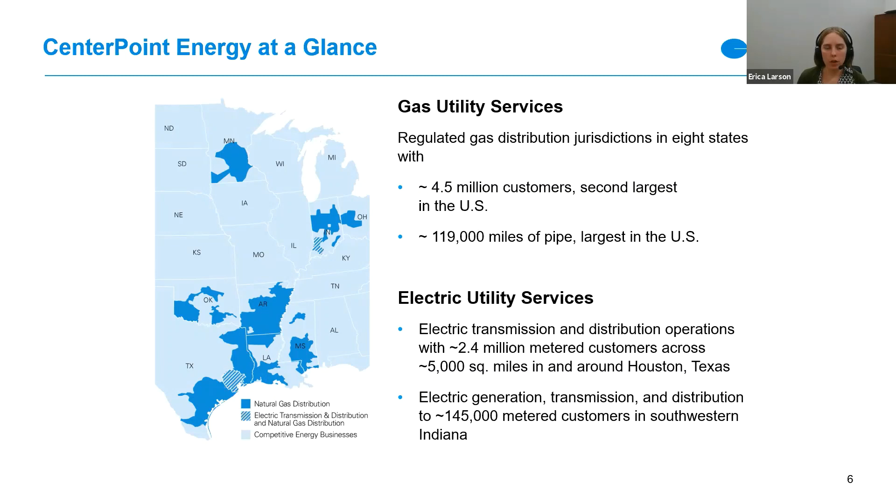Next slide. In Minnesota, we are only a gas utility. I'm primarily focused on Minnesota. We are by far the largest gas utility in the state. Our largest city is Minneapolis. Next slide.

So like many large utility companies, we have our own carbon goals. We have a net zero goal by 2035 for scope 1 and 2 emissions. This is largely focused on our electric generation that we have in Indiana, closing those coal plants, shifting to more renewable energy. It does have a gas component as well, mostly about leakage from our pipeline system, but it doesn't really incorporate much in the way of renewable natural gas, hydrogen, or some of these other technologies because it's not about the actual burning of gas in the customers' homes and businesses.

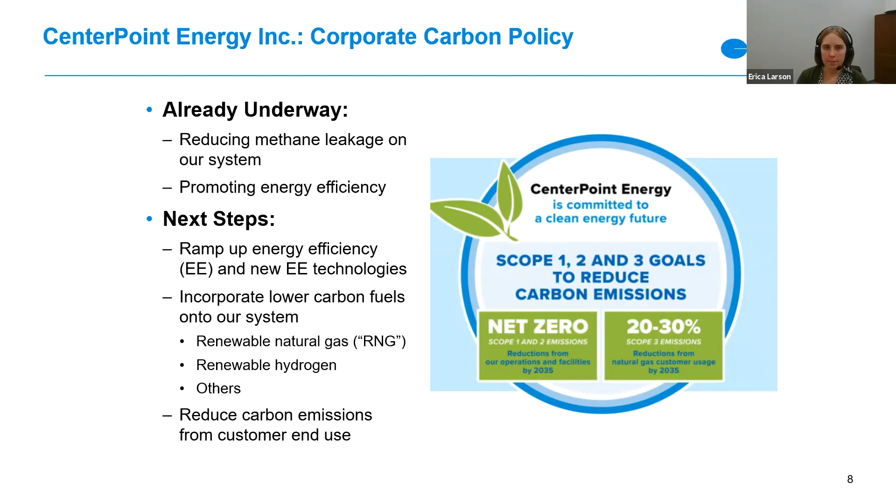So on the supply side, things that the gas utility could provide instead of fossil gas, we have renewable natural gas and biogas. Renewable natural gas is going to be primarily, we're thinking in the near term, from anaerobic digestion, although the Act also allows us to do thermal gasification or other effective conversion processes. But it does have to be from an organic source to be renewable natural gas.

Biogas is like renewable natural gas, except it's just not pipeline quality. So here we'd be talking about maybe moving gas that's produced relatively near the site of use over to specialized equipment that could burn unrefined biogas or less refined biogas than renewable natural gas.

Also in the Act are power to ammonia and power to hydrogen. Both of these are defined in the Act as being green rather than blue. So we're talking about using renewable electricity or carbon-free electricity, for example from a nuclear plant, to create either hydrogen or ammonia, and then using either of those on their own as a fuel source, or in the case of hydrogen, blending it into the pipeline system, which can be done up to a certain amount.

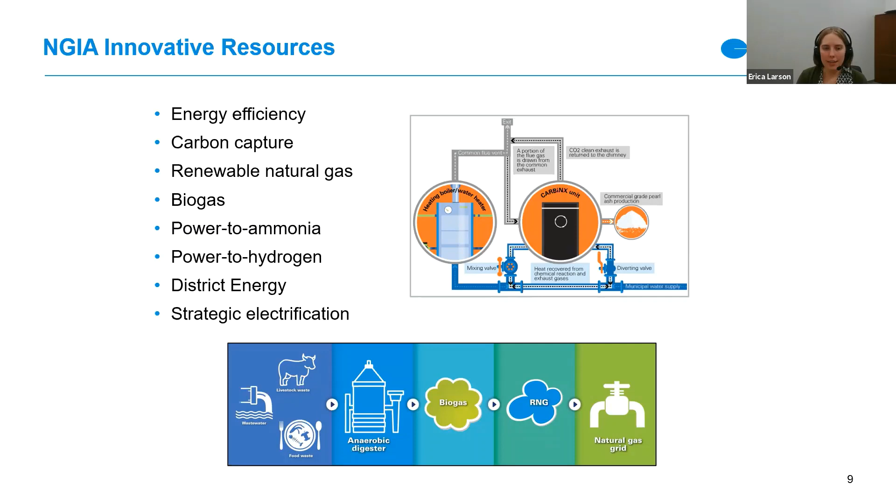Next slide. So this is my how does the Act work in a nutshell. How is it structured? A gas utility may file an innovation plan with the Public Utilities Commission proposing programs using these different innovative resources that were on the previous slide. It is optional for a gas utility to file a plan.

We didn't want anyone to get mad at us because they didn't want to do this, but CenterPoint certainly will be filing a plan in 2022. My understanding is that Xcel Energy, which is the second largest gas provider in the state, also plans to file an innovation plan in 2022.

Once a gas utility has elected to file an innovation plan, they are locked into the structure. So it is optional at the beginning, but once they file one plan, they are required to file another plan 4 years later. Each innovation plan will run for 5 years. After 4 years, the utility will file its next plan so that it will be in place before the next 5-year period.

There'll be annual status reports to the Public Utilities Commission where the PUC can order changes, can cancel programs, can add new programs. The PUC has authority to do this at any time, but this would be a sort of prompting for them to consider how an innovation plan is working.

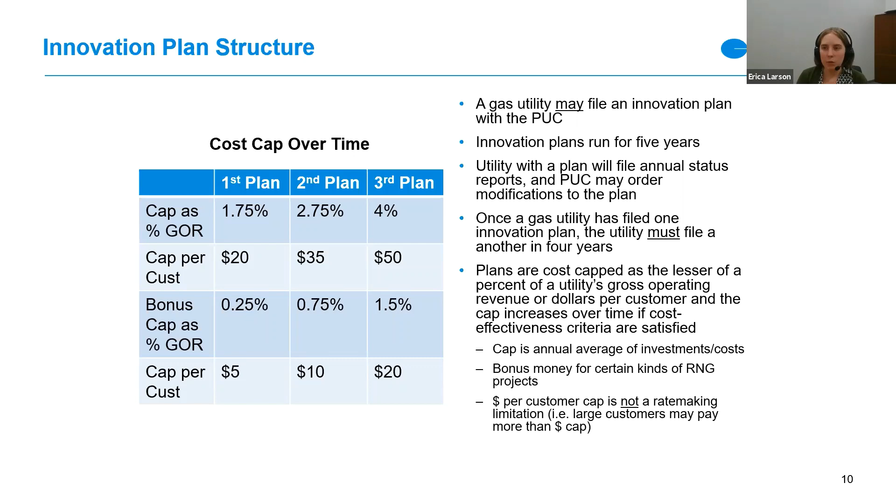Next slide. So now that I've talked a little bit about how it's going to work in terms of the regulatory process, I want to talk a little bit about what is going to be in this plan. The plan itself is going to be a massive document, and the regulatory process to get one of these things approved is going to be lengthy, especially in our first few innovation plans while the PUC is figuring out what it's doing.

So an innovation plan is going to include a lot of description from the utility about the carbon intensity of resources included in the plan and forecasted greenhouse gas emissions reduction or avoidance. The heart of this whole thing is to reduce greenhouse gas emissions, but the legislature also added specific additional goals they'd like to see come out of this process.

So the gas utility is going to be talking about whether their plan supports agricultural goals in the state, whether it supports waste management goals, how it affects low and moderate income customers, how it affects economic development, what jobs are being created in the state, and what the quality of those jobs is.

The plan will also include a lot of discussion of alternatives that the utility has for reducing greenhouse gas emissions. So for every program, every innovative resource included in the plan, the gas utility is going to have to talk about other ways that they could have achieved greenhouse gas reductions of those same greenhouse gases.

So for example, if the utility files a residential renewable natural gas program, they'll have to talk about why they didn't opt for a residential electrification program or a residential energy efficiency program. So focus still on that residential sector and the same emissions, but other options we have for reaching those emissions.

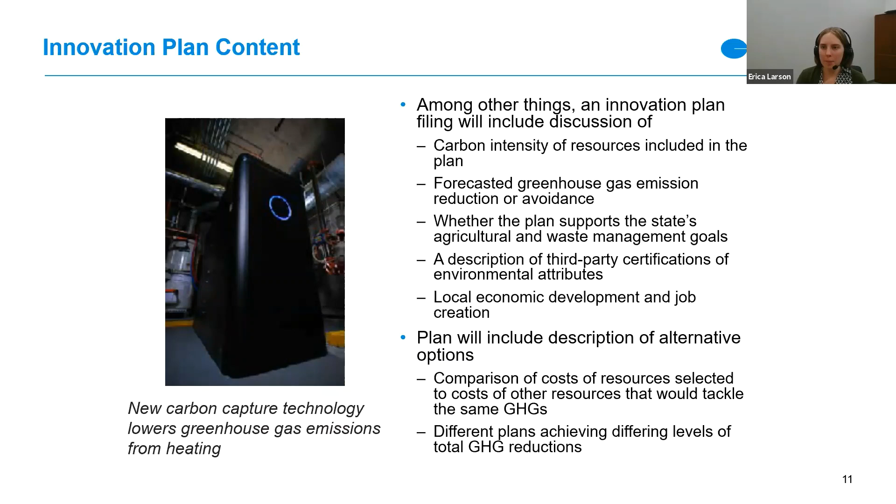Once the utility gets through this, I think at least year-long process of putting in a plan and having everyone come out and explain why that plan was bad and the utility should have done it differently, the commission will hopefully approve some plan going forward. And there's a list of things that they have to find in order to approve a plan. They have to find that the plan produces net benefits.

So this is talking both about greenhouse gas emissions, but also agricultural benefits, economic benefits, all of the things that the Act identifies as being something the legislature wants to have come out of this. The plan has to promote renewable energy, avoid greenhouse gas emissions. It has to promote local economic development. Every resource included in the plan has to have a lower life cycle greenhouse gas intensity than geologic gas. There has to be tracking and verification of the renewable resources used in the plan.

They have to find that the costs are reasonable. But this is a really important distinction that the Act makes, that the Commission has to find that the costs are reasonable in comparison to other things the utility could have done to reduce greenhouse gas emissions. So obviously, renewable natural gas is much more expensive than fossil gas. We don't have to justify renewable natural gas as compared to fossil gas. It has to be justified as compared to electrification or energy efficiency or one of the other options that the utility has for getting at these emissions that could be tackled with renewable natural gas.

Total greenhouse gas emissions have to be found to be reasonable, considering the state's goals. The state has a goal of reducing emissions by 80% by 2050. So they have to be keeping that in mind as they approve these plans.

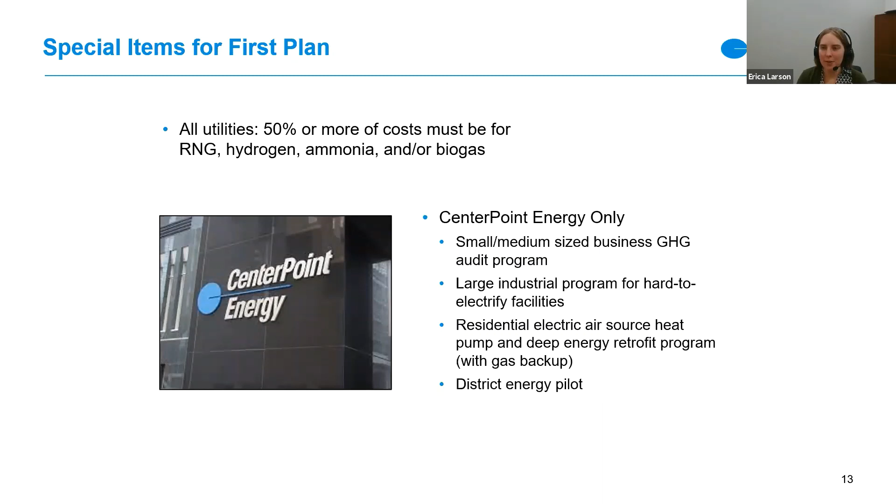Next slide. All right, and then this is the last thing I wanted to say before I'll turn it over to Dr. Pratap Pullammanappallil. Getting an act passed probably anywhere in the country, but certainly in Minnesota, requires a lot of stakeholders. A lot of people need to support it. And particularly with our divided legislature, we need people from all sides, from conservative and liberal backgrounds to support something. And I'm really proud of the stakeholder group we managed to build and the support we managed to get for the act. As I mentioned, AURI was a very important supporter.

We had environmental groups, Center for Energy and Environment, Conservation Minnesota, Fresh Energy supported the final version of the bill. We had more conservative groups like the Chamber of Commerce in support, and we had a lot of folks in between. We had unions, we had groups working for diversity in the energy sector. We had supporters of renewable natural gas, just a very wide group of people in support of the act. So that even if the act hadn't passed, honestly, I think it was very valuable just to bring all those stakeholders into one room and have them talk to each other. With that, I'll turn it over to Dr. Pratap Pullammanappallil.

Thank you, Erica. Thank you, Dan, for the introductions. I would like to provide an overview of anaerobic digestion. As Erica mentioned, it's one of the ways in which renewable natural gas can be produced. I would also like to touch upon an anaerobic digestion project that we are currently doing in Minnesota. The project is funded by Xcel Energy, and we're collaborating with AURI and Enterprise Minnesota. Next slide.

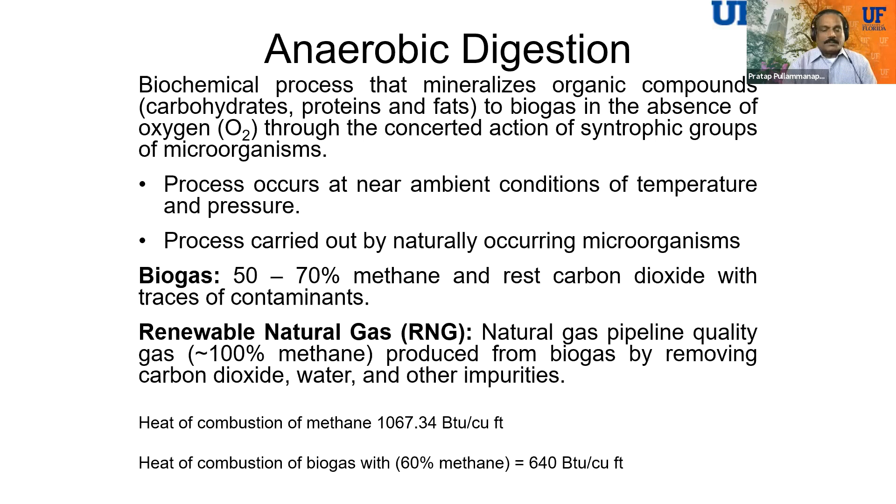The biogas can be upgraded. So all the CO2 in the biogas can be removed to produce 100% methane. And this is what's referred to as renewable natural gas. It has a heat of combustion of about 1,000 BTUs per cubic foot. Next slide.

The microbes that carry out anaerobic digestion can be found in nature. They can be found in ruminants, landfills, and sediments. But this is generally referred to as biogasification; anaerobic digestion specifically refers to those processes that occur in engineered systems. And it's got applications in waste treatment. It's traditionally been used for that.

And more recently, there's a lot of interest in using this process for biofuel production as it produces biogas. And from biogas, one can make renewable natural gas. Next slide.

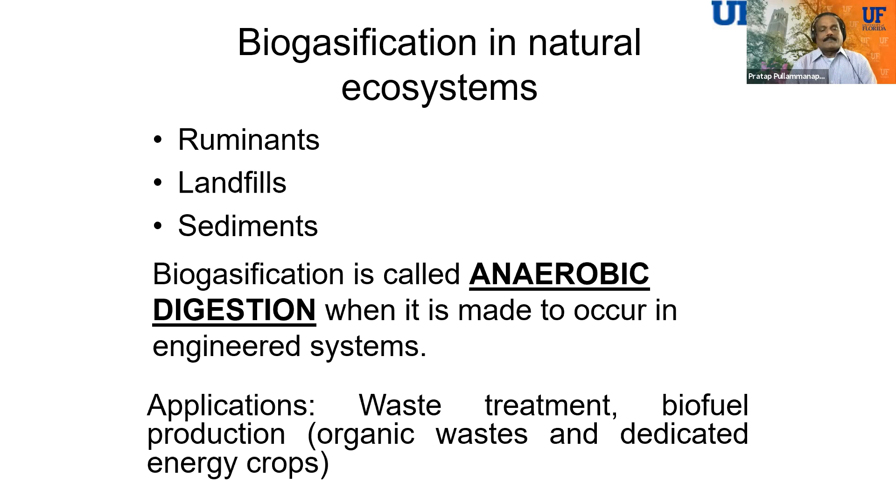It's not a one-step process in that it needs many different types of microbes to mineralize the organic compounds all the way to biogas. Whereas, say, ethanol fermentation is a one-step process. You've got one pure culture converting the sugars to ethanol. So typically you can think of the process as going through two steps. It's a simplification here. The organic wastes are first acidified to organic acids like acetic, propionic, butyric, and so on. And then the methanogens convert the acetic acid along with the carbon dioxide and hydrogen to methane and carbon dioxide.

So there is a lot of interest now in stopping the process at the organic acids and then using the organic acids for making bio-based products. That would be called a mixed acid fermentation rather than anaerobic digestion because it's not going all the way to biogas.

There's usually concern with odors in anaerobic digestion. Methane and CO2, which are the main products, are odorless. The odors primarily come from sulfur compounds, which are reduced to hydrogen sulfide during the process. They can come from ammonia if there's an excess of nitrogen in the feedstock. Methylamines or amines can produce odors. And the organic acids themselves can create odors.

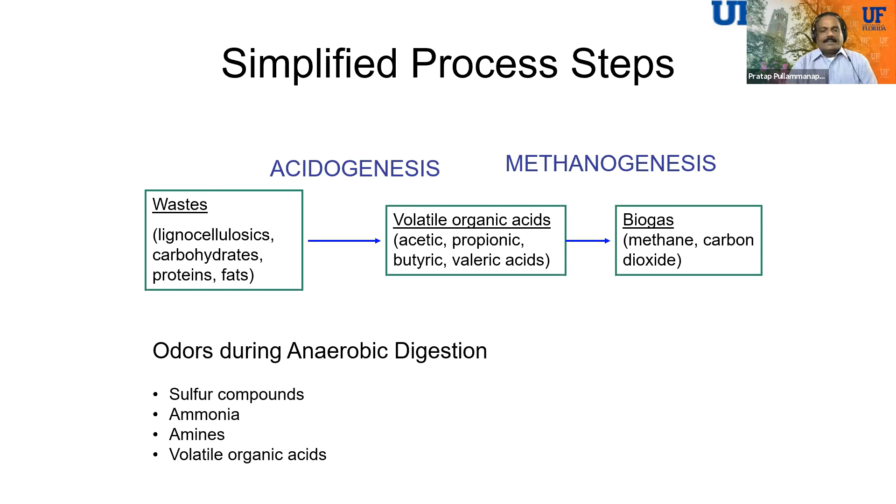This picture here kind of shows the closed loop nature of anaerobic digestion. On the left, I have the different organic wastes that are typically produced through industrial processing or agricultural processing. You could also think of growing energy crops specifically for the purpose of putting them in an anaerobic digester. These would then be processed through an anaerobic digester, which would produce biogas.

The biogas can be used on site for power generation or for thermal applications, or it can be upgraded to renewable natural gas and then injected into the pipelines. It can be taken elsewhere for power generation, for use as a vehicular fuel, or maybe as a raw material for syngas production, from which you can make other products.

The digestate, which contains some of the solid residue and the effluent water, can be land applied. In this process, only the carbon is converted to biogas. The nitrogen and phosphorus are conserved, so those can be returned back to the soil as a fertilizer. But of course, there are other considerations to be taken into account for utilizing this digestate. I will talk about that in a later slide.

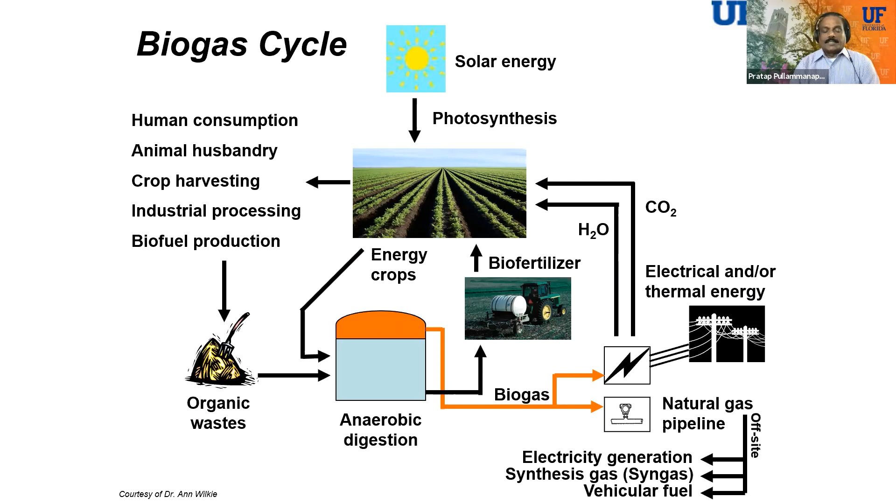So once you utilize the biogas or the natural gas, you're going to be releasing CO2 and water. You can think of that as going back through photosynthesis to the plants, and then the whole cycle repeats itself. In terms of the net energy requirements, probably about 20% of the energy that's released in the biogas would be required to run the process. So there is a net energy generation. Next slide.

This slide shows you the different utilization options. As I said, biogas can be used for thermal energy on site. It might have to go through some minimal cleanup like desulfurization and moisture removal. It can also be used for CHP, for power and heat on site.

The gas can be upgraded. Upgrading here refers to removal of CO2, hydrogen sulfide, ammonia, and other volatile organics to give you almost pure methane, which is renewable natural gas. It can be compressed and used as a fuel, or it can be boosted, odorized, and pumped into the natural gas pipeline. Or you can also reform the gas, converting it to hydrogen for use in a fuel cell, for example, for generating electricity and also heat. Next slide.

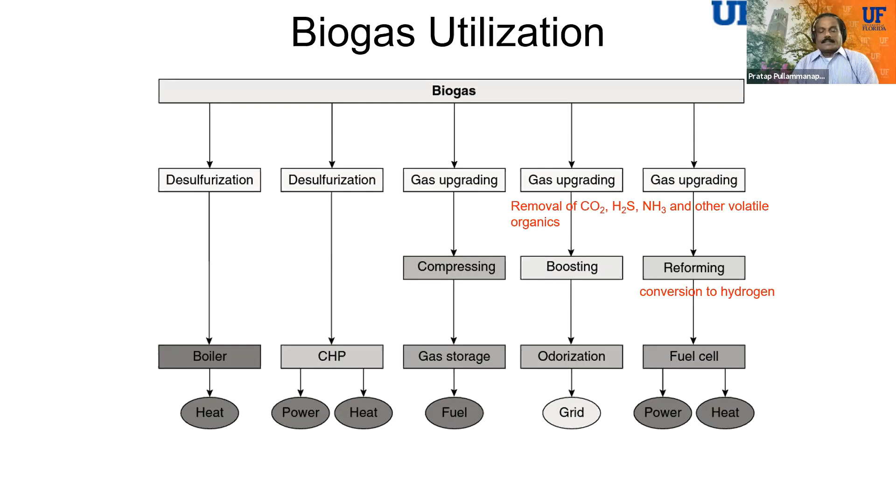So what I want to do here is to compare the energy potentials of two options. One is making ethanol, and the other is making methane through anaerobic digestion. I've used a simple molecule like a sugar, could be a carbohydrate. So if you were to put the sugar or a carbohydrate through an anaerobic digester, for every pound of sugar you would make about 0.22 pounds of methane. And the BTUs generated from the methane would be about 5,000 BTUs for every pound of sugar.

If the sugar were to be fermented to ethanol, the amount of ethanol produced would be about half a pound of ethanol per pound of sugar. And from an energy point of view, that's equivalent to about 5,000 BTUs of ethanol per pound of sugar. So irrespective of whether the carbohydrate is taken through for methane production or for ethanol production, the energy content of the product is about the same. Except that in the case of methane, you get a lower mass. The rest of the mass of the sugar goes off as CO2.

But then in the case of ethanol, you'll also have to include the energy associated with distillation and energy associated with, for example, pre-treatment, if it's cellulosic ethanol. And then the net energy produced would be much lower. Whereas in the case of methane, methane is not very soluble in water. So as soon as it's produced by the microbes, it just comes off the aqueous phase into the gas phase. Not much energy is required to separate the biogas or the methane from the aqueous phase. So from a net energy perspective, there is more energy that can be obtained by making methane than ethanol.

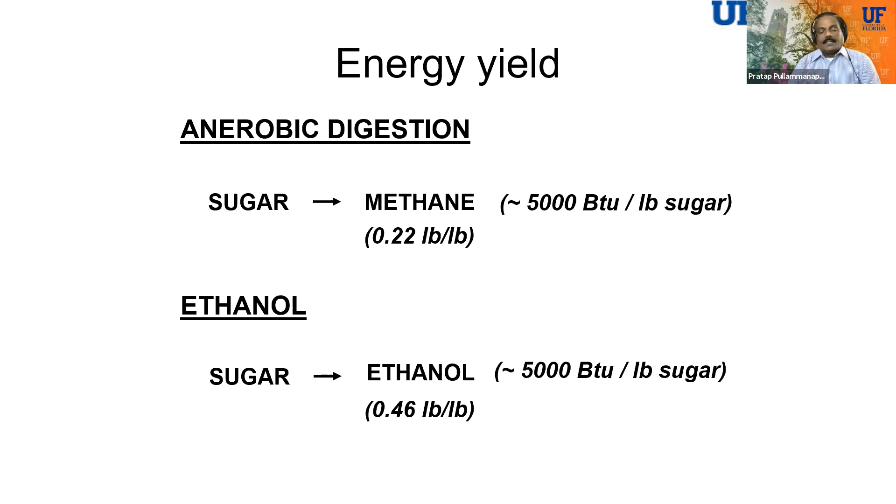So if one were to look at setting up an anaerobic digester, what would need to be considered? The first thing is how much methane can be produced from the feedstock at hand. You determine that by doing what's called a biochemical methane potential assay, or BMP. A BMP would tell you how much methane can potentially be produced from a certain mass of the feedstock. And if this methane potential gives you reasonably satisfactory values for setting up an anaerobic digestion project, the next consideration would be the type of digester design that has to be chosen for processing that particular feedstock. Anaerobic digestion is a mature technology, and there are many different digester designs out there. I'll mention a few designs in the next slide.

The next thing comes to the operation of the digester. It's necessary to maintain a proper pH, and the typical pH favorable for the microbes, especially the methanogenic microbes, is about neutral. So it's necessary to have in hand alkali or caustic or acid to control the pH. The next operational parameter of importance is the temperature. Anaerobic digestion can be operated at different temperature regimes. We'll talk about that in a couple of slides. And then come the nutrients. Many feedstocks may not have all the nutrients that might support the growth of the microbes, so it's necessary to ascertain what additional nutrients might be required.

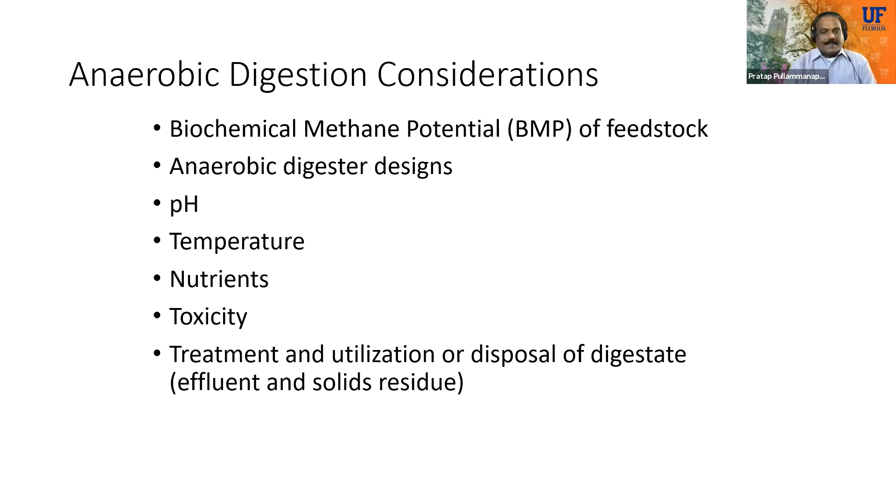Then there are two-stage digesters where the acidogenic phase is separated from the methanogenic phase. For example, the solid substrate would first be acidified, and then the acidified liquid would be taken through a methanogenic stage for making the biogas. There are designs out there which look into that. And typically the type of design that you'd use will depend upon the characteristics of the feedstock, especially the solids content. So if it is low solids, like many industrial wastewaters or municipal sewage, you could use an anaerobic filter or an upflow anaerobic sludge blanket reactor.

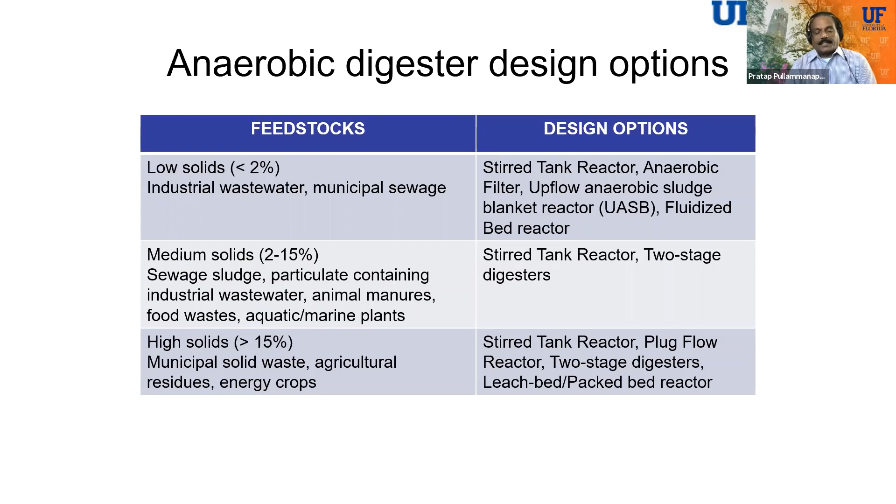If there is some particulate matter, you might be limited in the type of designs that could be used. So typically a stirred tank reactor would be employed. And for high solids, what I have in mind is municipal solid waste or agricultural residues and energy crops. You could use a stirred tank reactor by making a slurry of this solid feedstock, or you could use plug flow reactors and/or two-stage reactors. Next slide.

Temperature: digesters could be operated at very low temperatures, which we call psychrophilic temperatures, or at mesophilic temperatures, which is close to our body temperature, about 38 degrees Celsius or so. And then the higher, thermophilic temperatures, running at about 55 degrees Celsius. So each has its own benefits. With mesophilic and thermophilic operation, because they're running at a higher temperature, you might need to provide some kind of heating. Of course, thermophilic temperature will require more energy input for maintaining the high temperatures.

The benefit of thermophilic temperatures is that you get much faster rates of breakdown of the organic material, which corresponds to increased rates of biogas production. And also due to the high temperatures, if there are pathogens, whether human, animal or plant pathogens, you achieve a much higher pathogen inactivation with thermophilic operation than with mesophilic operation.

A benefit of mesophilic operation is that you have a much more diverse group of microbes that operate at these temperatures. So it might be possible to break down many different types of molecules due to this diversity in the microbes at mesophilic temperatures. Next slide.

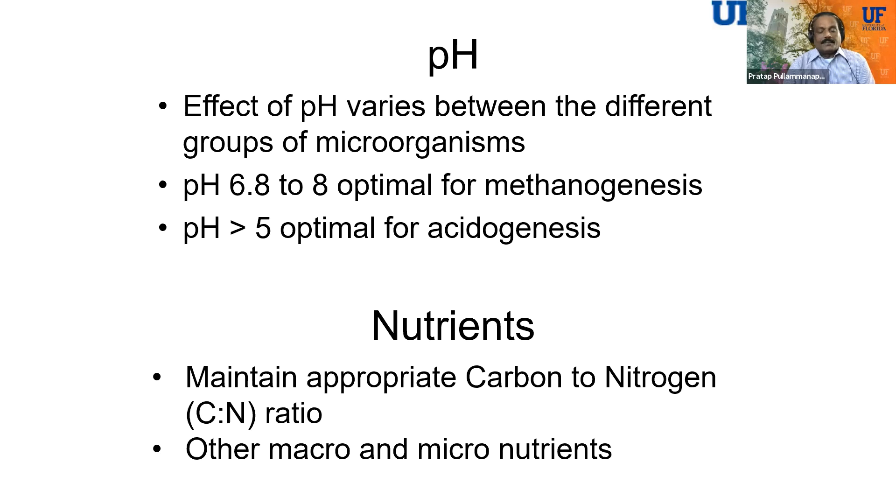It's also important to maintain an appropriate carbon to nitrogen ratio in the feedstock for proper anaerobic digestion. Typically, microbial cells are about 50% carbon on a dry basis and maybe about 14% nitrogen. So one needs to supply enough nitrogen to support the growth of the microbes. Typically a ratio between 20 to 1 and 30 to 1 is considered a good ratio. And one also needs to provide other macro and micronutrients like phosphorus, and micronutrients like metals. So it needs to be ensured that such nutrients are available in the feedstock, or they have to be supplied separately into the digester. Next slide.

Some feedstocks, depending upon the source, might contain high salt, which can be inhibitory to the process. Heavy metals can be inhibitory. High levels of sulfide can cause inhibition. And the presence of, say, bactericides can also suppress methanogenic activity. So it's necessary to ascertain whether there are any toxic components in the feedstock that could adversely affect the process.

Having said that, for many of these inhibitory compounds, the digester inoculum can be acclimatized to tolerate these toxins to high levels. For example, in our laboratory, we have been able to conduct anaerobic digestion at seawater salinity. So it's possible to acclimatize the microbes to tolerate many of these toxins. Eventually, some of the toxins would be degraded. Next slide.

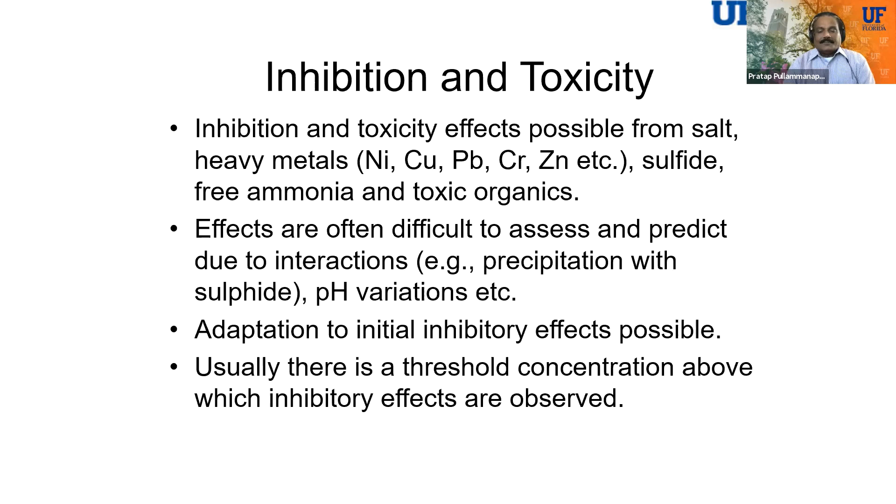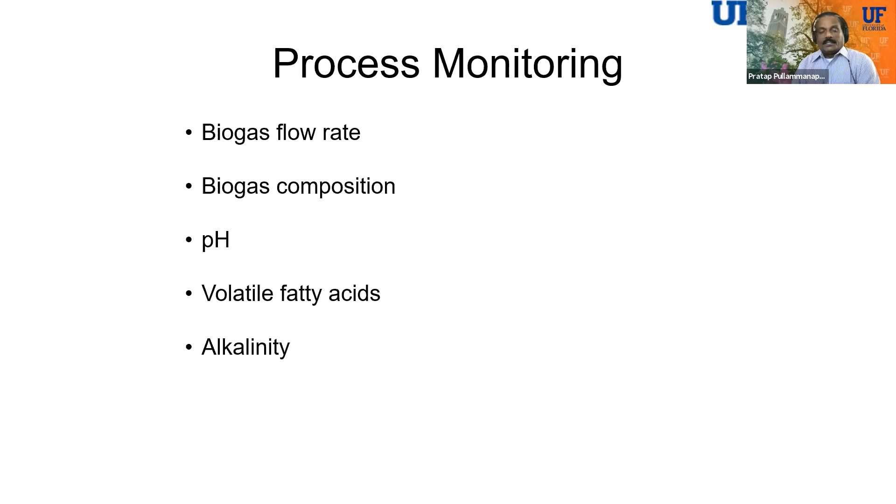It's also necessary to monitor the digestion process once the digester is set up. The biogas flow rate is typically monitored, as well as the composition, the pH, volatile fatty acids, and alkalinity. The last three, the pH, volatile fatty acids, and alkalinity, can be monitored through a simple titration technique. Next slide.

That's something we looked at in a project about 10 years ago with American Crystal Sugar Company, where we built a 3 tons per day pilot plant to process their waste pulp, the tailings, and the raffinate. And we also worked with Hennepin County on anaerobically digesting source-separated municipal solid waste. Next slide.

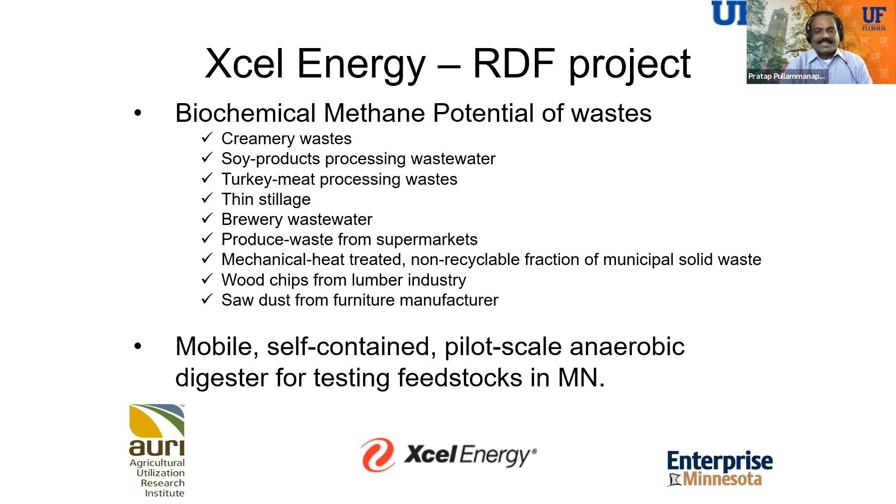So just a description. So this pilot unit contains a feed bin with a grinder pump. So you can look at digesting solid feedstocks as well. We have two 1,200 gallon digesters housed in this trailer. It has transfer pumps for recirculation, feeding, digestate removal, and so on. It's got a biogas metering device, a gas analyzer for gas composition measurement.

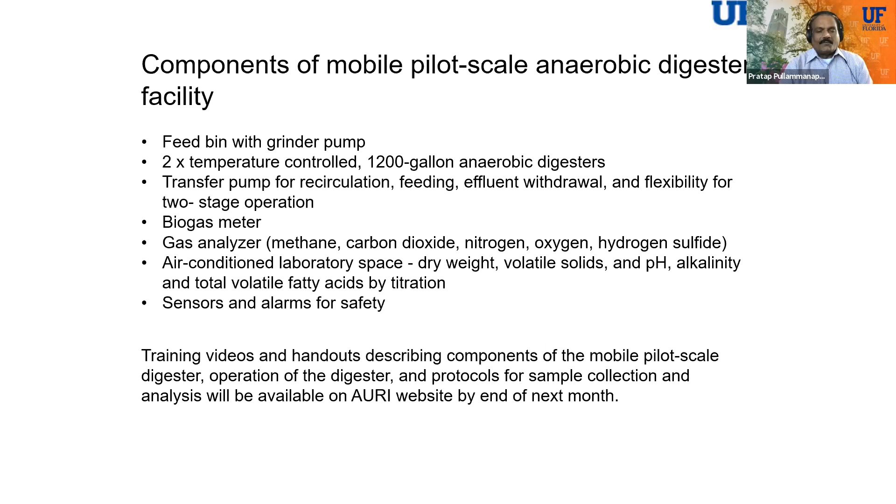This part of the trailer is separated into a laboratory space where we can do dry weight, volatile solids, pH, VFA, and alkalinity analysis. And it's incorporated with many sensors and alarms for safety. Training videos and handouts describing this component will be uploaded into the AURI website in the next month or so.

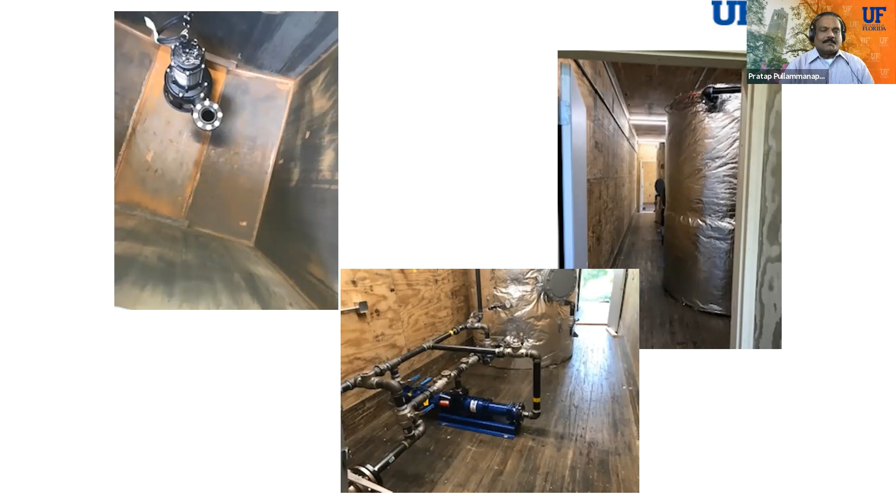And on the left side is the pump, the grinder pump inside the feed bin, which can grind the feedstock if it contains solid material, or it can pump the feedstock into the digester. So what you see there on the right side picture is the two digesters, one behind the other. So you can run the system as a two-stage digestion system, because one of them can be used as an acidogenic reactor and the other can be methanogenic. In fact, the reactor at the far end is an anaerobic filter. It contains packing material in it.

Or you can use a second reactor as a storage of inoculum. So if something goes wrong, you can add the inoculum from the second reactor to the first reactor to get the whole process going again quickly. And in the center of the picture there is a transfer pump, which can move liquid from the first to the second reactor, or recirculate liquid, or add feed, or take digestate. So it serves many purposes.

So as I said, we will post a video of the system, as well as the operation of the digester and the lab analysis that we can do there. So these will be posted on the AURI website soon.

Thank you. I think that's it. Thank you. All right, thank you. Should hopefully lead to some interesting questions. We have a lot of people on today that are involved in this in one way or another. I kept thinking, every time I came up with a question, Dr. Pratap, you seem to answer it with your next slide.